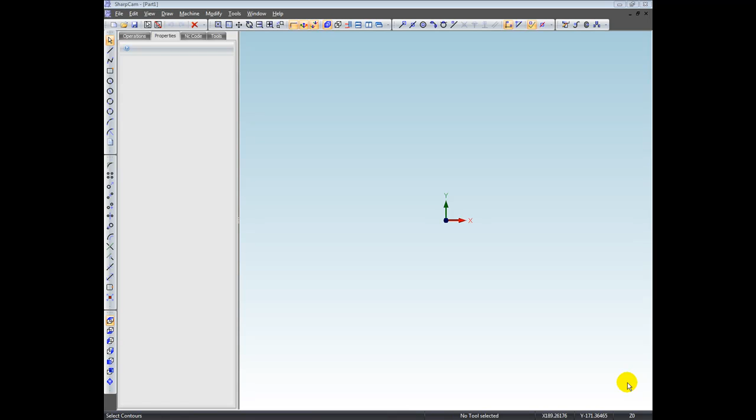So to this end, we've developed quite a complicated test shape called Take the Test, and that's a DXF file that's published on the website. So let's go ahead and actually open this DXF file. So I'm going to click the Open command, and then choose the file of type DXF, and there it is, Take the Test. So I'll double click that. Okay, and there we go, and that's the Take the Test shape.

Now let's just zoom in with the middle mouse wheel on the letter A here. Just want to point something out to you. At the moment, we have a series of purple dots. So each contour is marked by a purple dot at the beginning and the end. So that's what actually tells you that it's an open contour. These need to be connected up. We have a concept of connecting in SharpCam. We don't chain. It's a pre-process operation. We're going to connect it up first.

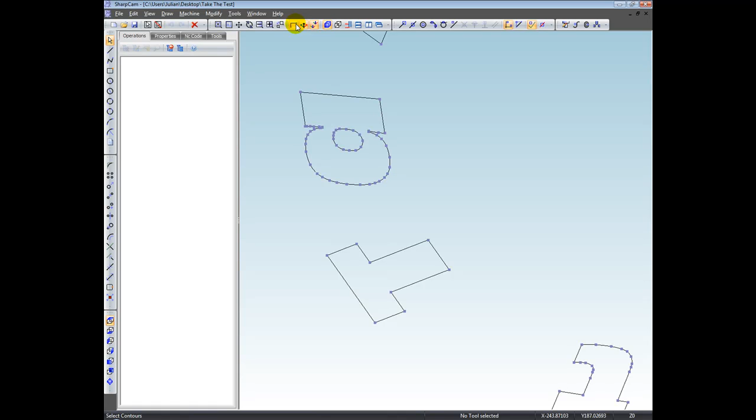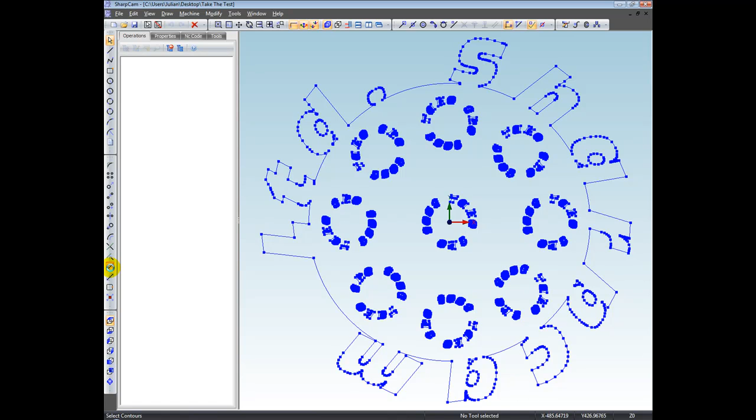And just out of interest, we can turn off the connection markers there if they irritate you, but I recommend you leave them on. So let's just zoom all. So we want to connect all these open contours up. Well, the quickest way of doing that is to select all. So I'm just going to choose the Select All command, or Control A as a shortcut. Then I'm going to press the Connect command. This will now go ahead and connect what it can. If it can't connect it, it doesn't really matter. But that's just going to automatically sort everything out, basically.

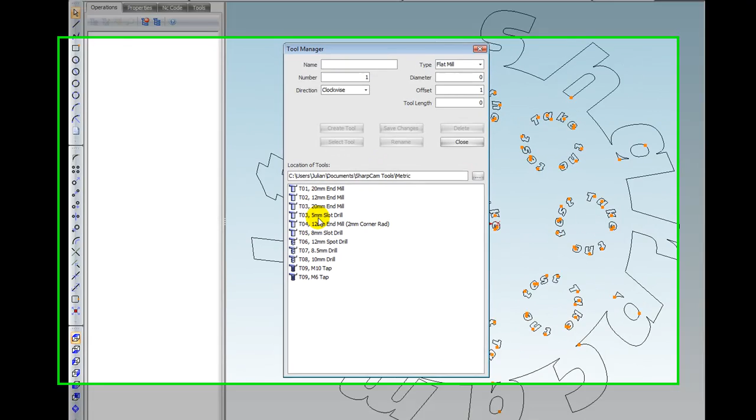And there we go. We've basically got a series of orange dots. Now, an orange dot indicates the start stroke end point of a closed contour, and we need to have closed contours for pocketing. So this is now ready to pocket. So let's zoom all. First thing I need to do is choose a tool. So let's go and select a tool. A 5mm tool is the tool you need to do this test with. That is the smallest tool that will fit through all the gaps and not go on the inside of, say, the little part of the letter E. It won't try and go inside that. So it's going to just generate one single toolpath and stay down and do that.

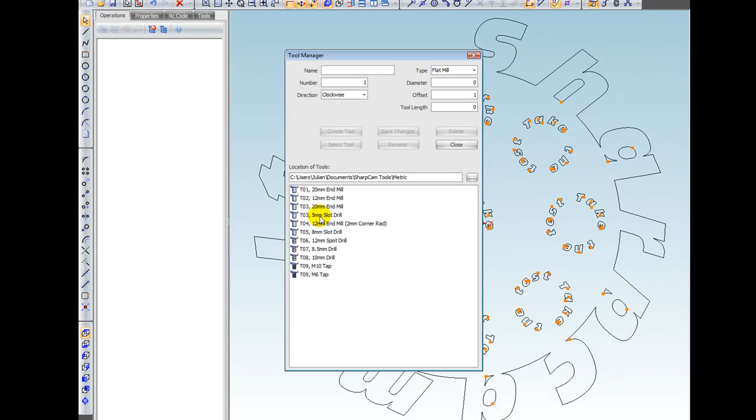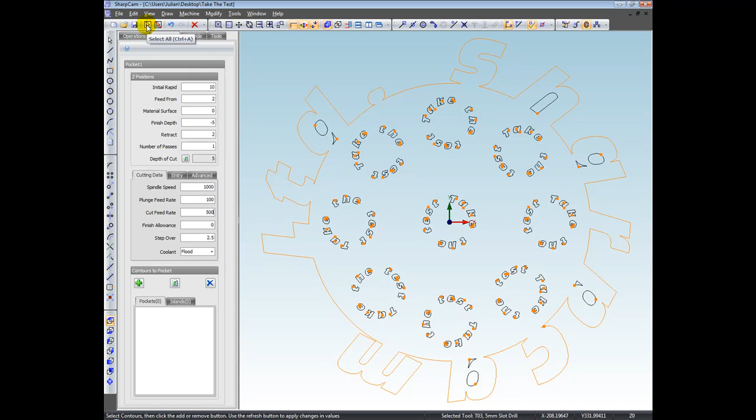So I'll double click that, and then I'm going to choose the pocketing, with its initial rapid point of 10. I'm going to come down to 2, and then finish at -5 and return back to 2. Just put some speeds and feeds. I'm not too bothered about this. Okay, so that's the cutting data. So to actually pocket this, I'm just going to need to select what I want to pocket. So I'm going to select all because I want to do everything. Then I'm going to click the Add button now.

So I'm going to keep talking just so there's no interruption whilst it's calculating, and just to prove to you how quickly this is working out the pocketing routine. So hopefully this will be done very shortly. There we go. So that has pocketed. Just out of interest, in the Pockets tab, we've got 37 pockets and we've got 108 islands. SharpCam will automatically work out what's a pocket and what's an island for you.

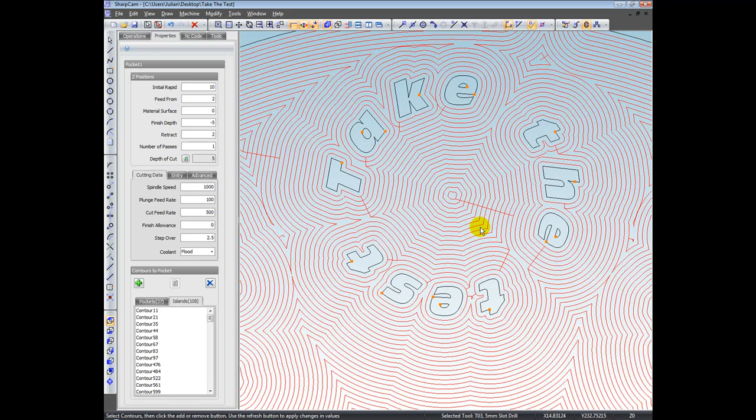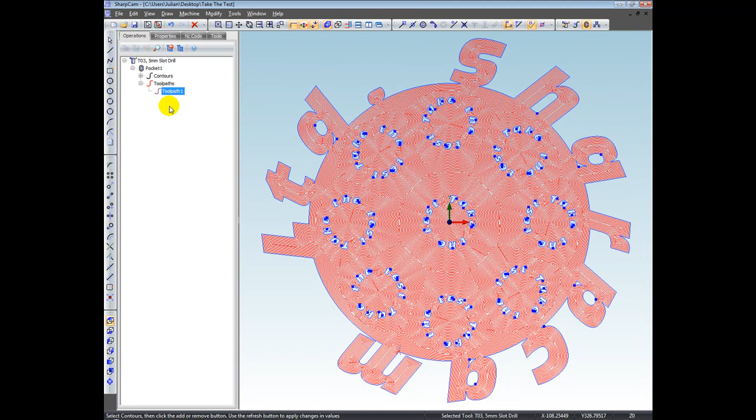That's taken care of. Let's just zoom in with the middle mouse wheel, and you can see all the toolpaths here. Difficult to tell what's going on, but if I just go to the Operations tab, expand Pocket 1, and then expand the toolpaths node, you see there's just one single toolpath. If it lifted up, then there would have been another one generated there. So that's basically it. That has pocketed that in one fell swoop. Now, I encourage you to download the test file and try it on your existing CAD/CAM system, and then download the demonstration version of SharpCam and compare the results.

I should also point out that the NC code has been created. So if we click the NC code tab, you can see that we've got 30,000 lines of NC code. The PC that I'm using here, the spec is detailed on the website where you watch this video from. The PC certainly isn't the fastest one in the world. I think it was purchased in about 2005 from memory. So a newer PC will be even quicker.

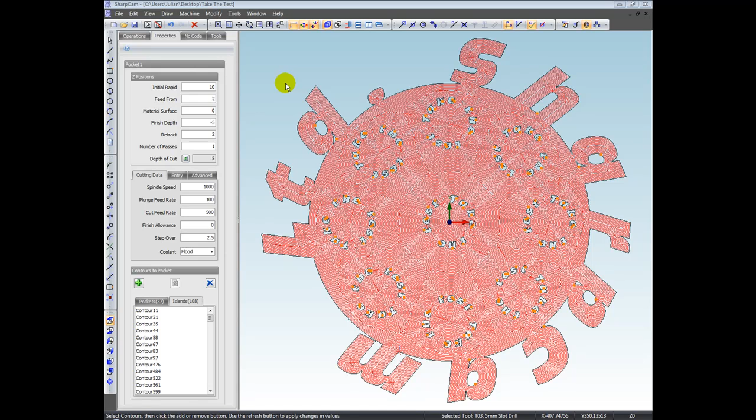I should also point out that we called this type of pocketing offset. Some systems might call this something different, for instance concentric or contour, but we called it offset. There are other types of pocketing styles, for instance zigzag or high-speed machining, and we plan to be developing all of these in the near future.